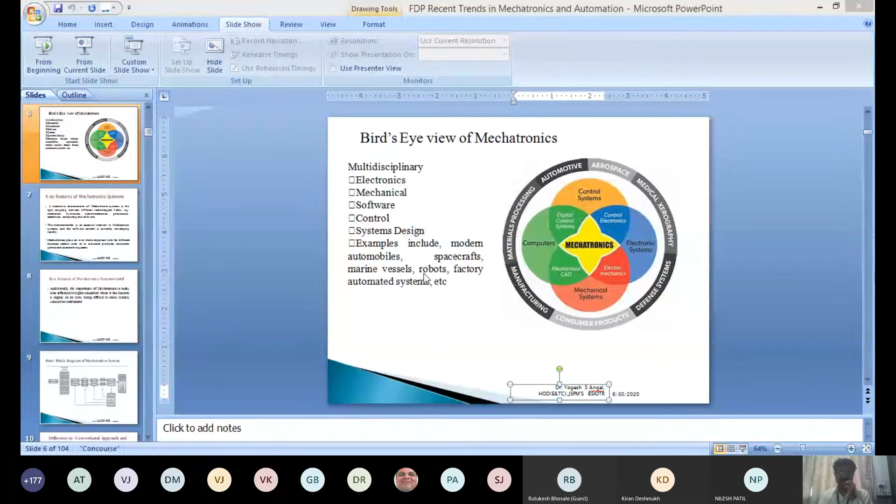Sir, please change the slide, it is remaining there. I have changed the slide. After changing, the slide is only not changed. On our screen, the slide is remaining the same.

First slide itself, bird's eye view. So I view the bird's eye view, that view screen is mechatronics remaining.

I think sir there is some issue with something. Internet connection, there is no issue now. The light came back, and I am on that particular slide, but I am not able to run the presentation. That means though I am running it, it is not getting reflected over there.

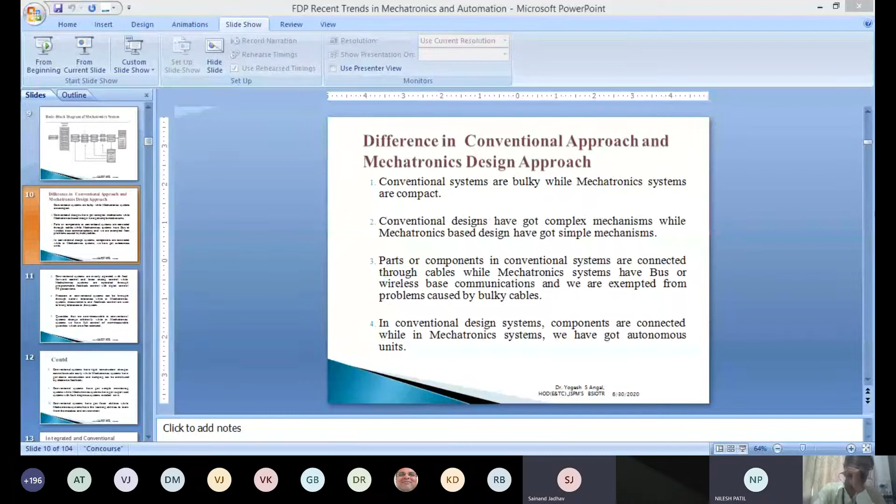I have to go back again. Now you will be observing the slide. I have to go back, then again start with the current slide. Now you will be observing conventional systems are mainly operated, isn't it? Yes sir, because I stopped and went back to my PPT presentation, then started again. That means current PPT.

Getting it? This is what is happening right now. Now suppose I go ahead, you will not get the next slide. You are not getting the next slide, no? You are having the same slide I showed previously. Yes sir, same slide is visible. That means it is not a problem from your side, my side, or the internet side. I think this is to be improved as far as Microsoft Teams is concerned.

Yeah, Microsoft Teams issue, we have to improve it, give feedback to them. Now I should not use this sentence during the presentation, but repeatedly I have to go to the previous slide and start with the current slide, then I will get that slide. Getting it? Okay yes. That is what I observed because I did it 5-6 times and came to the conclusion. Previously I thought there was some mistake with internet speed, maybe from my side or your side, but it is not like that. Now I have power, internet connection properly, there is no issue.

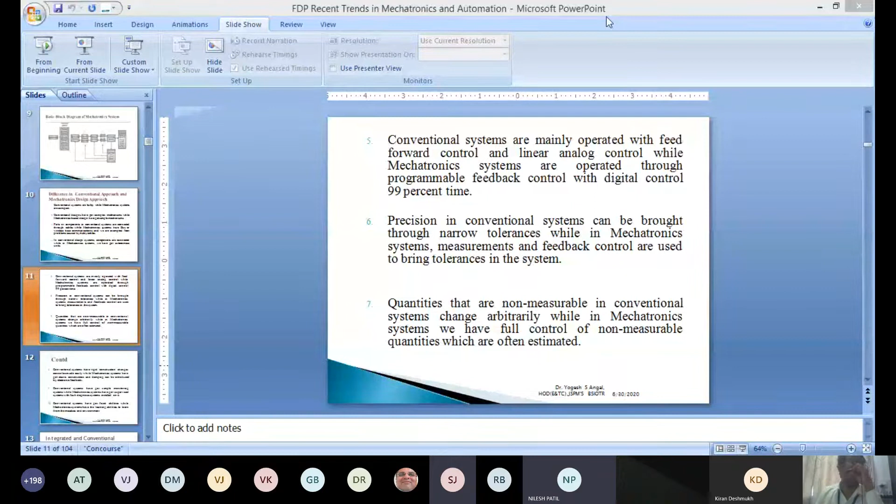Last session it was correct, no problem. In the morning session there was no problem. Slide show. So what I will do, you do one thing sir, you start from your side, I will stop my presentation. Patil sir, you do this. Because we have to take the presentation properly, otherwise I will not find it comfortable if I am not able to deliver due to some issue.

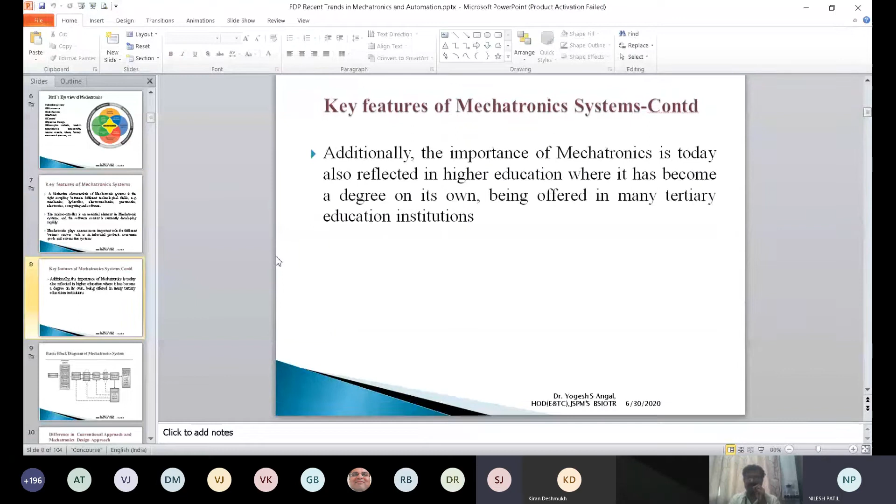Now I am not observing it. When you are delivering from that place, I am not able to see the PowerPoint presentation here.

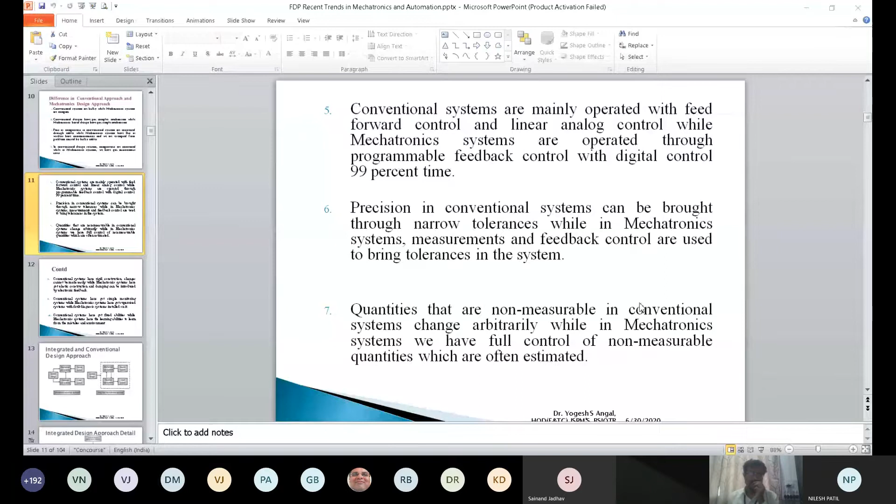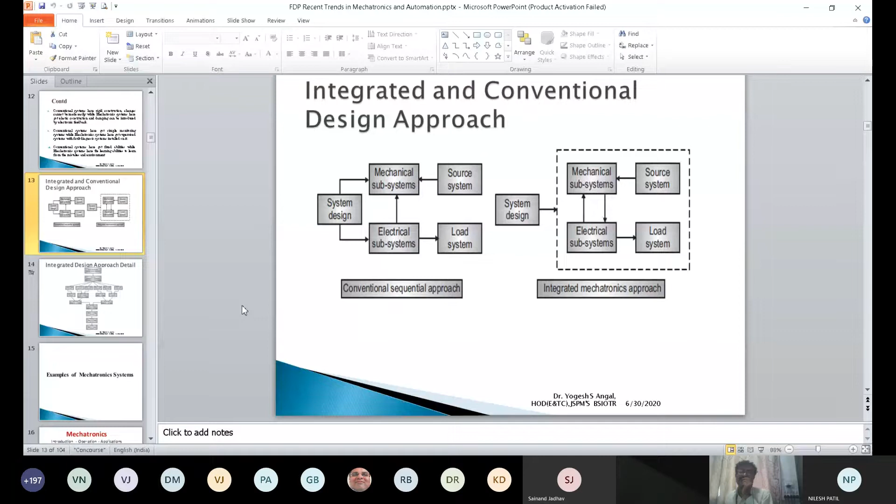System design approach in both integrated and conventional system design is different, as shown in the block diagram. Now let us understand that we have mechanical systems, electrical systems, source and load which are integrated, as shown in the integrated design approach. Here it is shown that there is a need of identification.

When designing a mechatronic system, first of all we have to identify the need and objectives of the system that you want to design. Then we can define the engineering specifications. We have to write down all specifications of the product that you want to design, which are quantitative and measurable parameters. That means size, shape, speed, torque, voltage, current, machine learning algorithms, or smart systems that you want to implement. Everything should be designed on paper.

Then we can separate the design into different parts like operating system, control systems, information systems, electronic systems, mechanical systems, and electrical systems. That means your design specifications are divided and classified into 6 parts: operating system, control system, information system, electronic systems, mechanical systems, electrical systems. These are the 6 domains under which you divide the specifications.

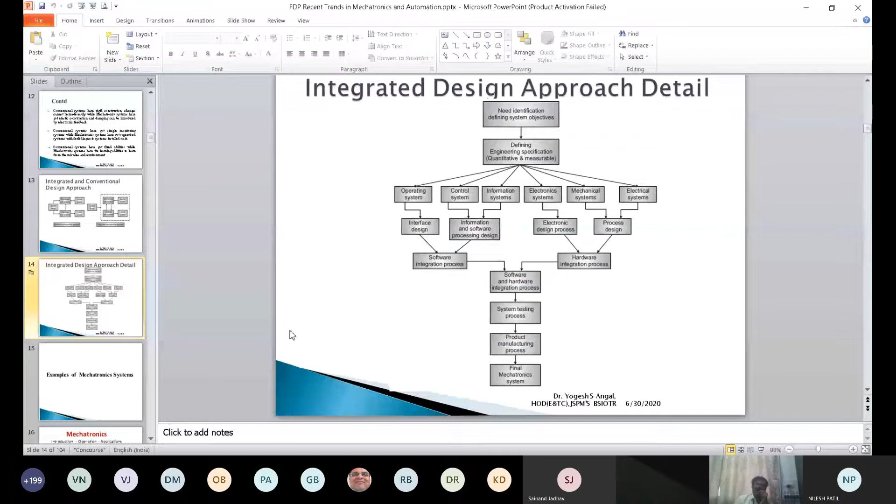This is how the integration works. Hope this integration part and conventional part you may be able to understand.

Now mechatronics has different applications. All these are latest trends. If you observe mobile phones, CNC machines, robotics, IoT, Industry 4.0, everything is now getting smart. Right from drilling machines, cars, gearing mechanisms, cameras, everything is getting automated in a compact way from the integration point of view.

Now maintenance takes place on a card replacement basis. In a mobile camera too, if it is possible to take out the camera from that embedded system, you can replace it, but it is not that easy as I told you.

Human hand, human leg, human body parts can be replaced. But what are the conditions? Let us say a 70 year old person wants to replace a limb or hand. The doctor will not recommend it. Why? Because his resistive power is less, his quality of acceptance and sustainability is less, and he will suggest not to go for surgery. His immunity and resistive power are less, and though we can do the surgery, we will not recommend replacing it because it will create more problems, as he may have diabetes, asthma, high BP or low BP.

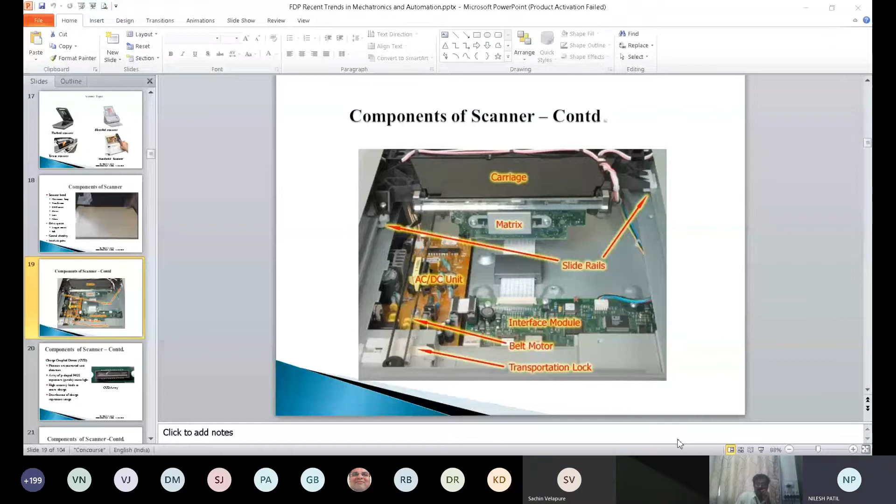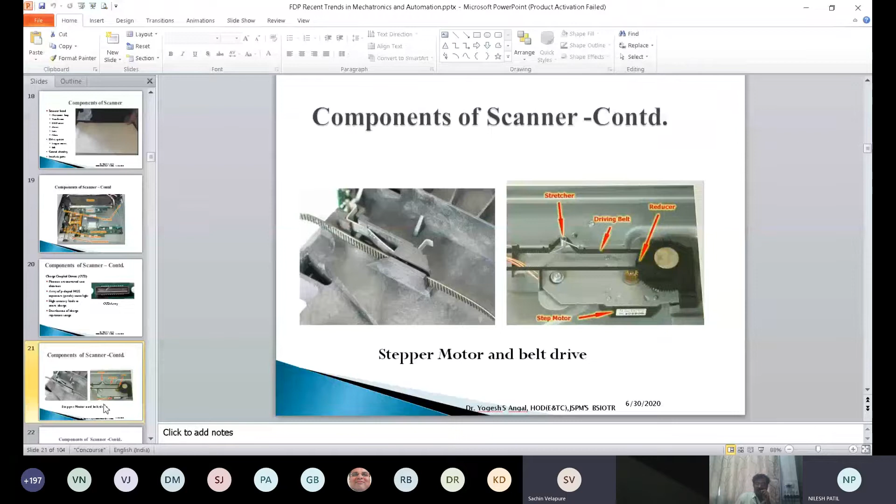Next slide. Now go again on next slide. Every component is shown over here. Now you just see it. Please wait, please wait. This is the components of scanner. Now this is the interface controller. If you observe over here, interface controllers, or you can say, various components which are shown over here.

It is consisting of ADF adapter, then transparency adapter, then USB. What is ADF adapter? Any of you know about ADF adapter? It is automatic document feeder. It is a feature in printer, photocopiers, fax machines, or scanners.

A stack of paper is put into the machine and is then automatically fed through, allowing the user to print or scan a copy without having to manually feed, which is called automatic document feeder. Then transparency adapter: it is a device or port available in flatbed type of scanner to scan 35mm slides and other film transparencies. It provides a mechanism that shines light through the film.

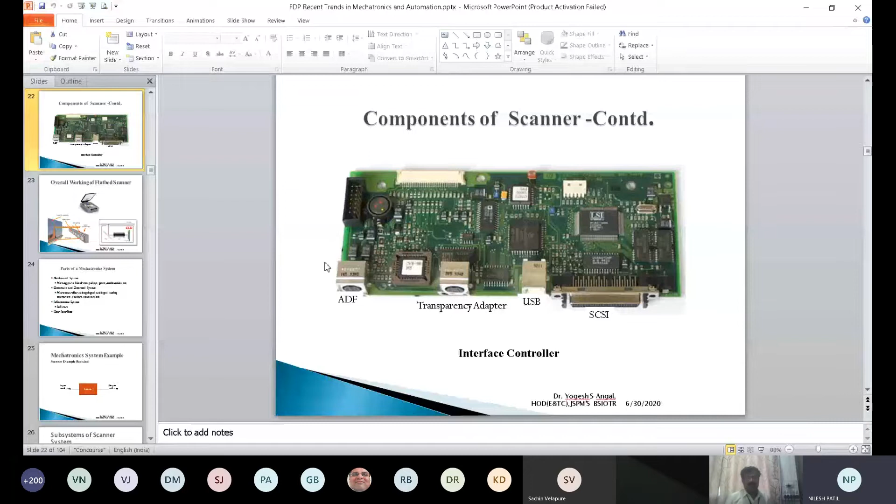Next. Now overall working, as I told you, the sensor bar is shown over here, consisting of different sensors for scanning the document. The charge coupled device will convert the light into electrons, and these electrons will be stored in the computer as an image, which you store in the memory of the computer. This is how the flatbed scanner works.

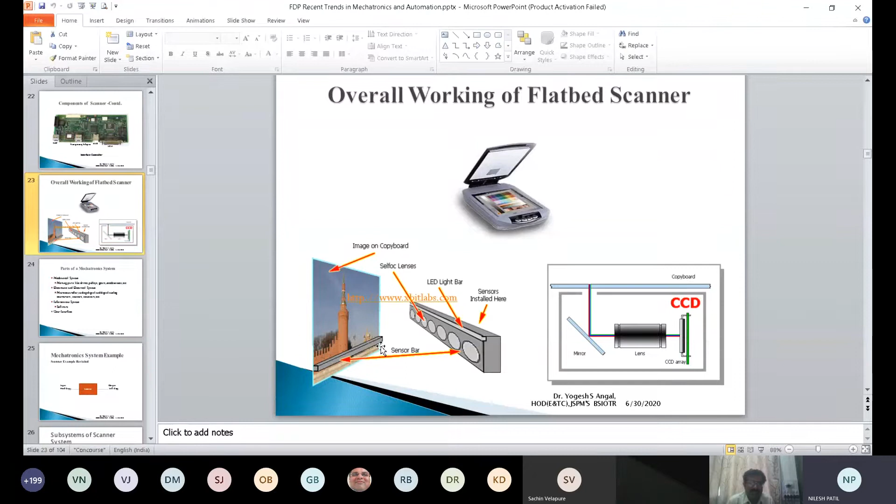You can understand the application of flatbed scanner as a mechatronics system.

Now, mechatronic system example. Let us revisit our scanner example. In scanner, what is the input? Hard copy. What is the output? Digital scan copy of that system. This is the example of mechatronic system as we have seen.

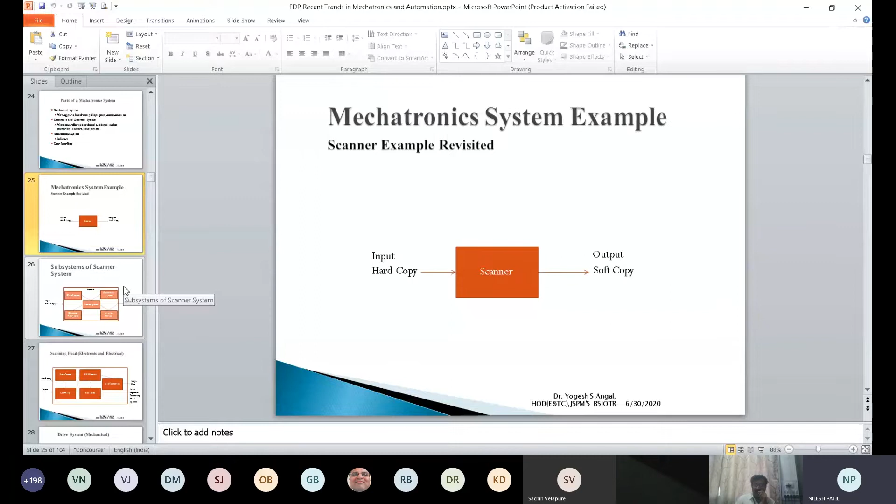Now the scanner system consists of input as a hard copy and output as a soft copy of the data that you are getting. Now the scanner components are divided into device, systems.

The scanner head is connected with all parts of the system, that is the driving system, which may consist of pulley and stepper motor. The illumination system will consist of beam of rays coming from LED array, and character recognition which is stored on computer after scanning, and other devices used for interfacing, maybe connecting for printing the document from a printer connected with the scanner.

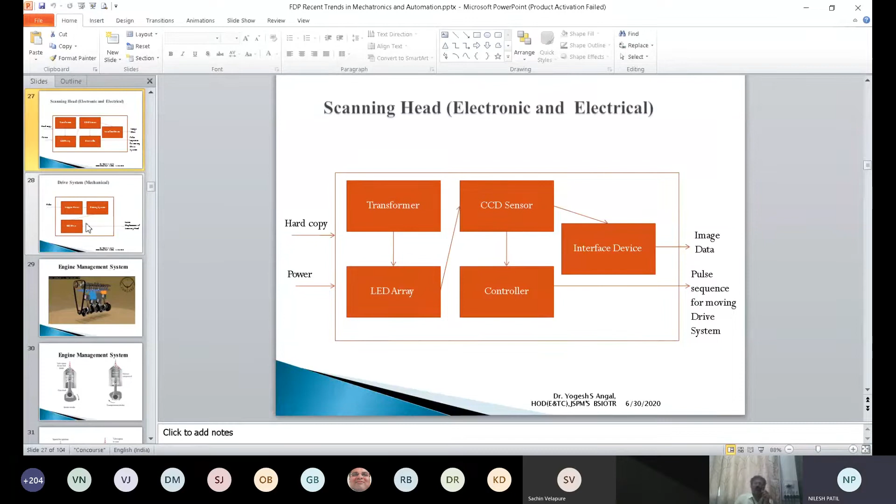Now the drive system, which is mechanical, generates the motion. The pulse input given from the controller will drive the stepper motor and gearing mechanism, which is connected with the belt drive and will cause the linear displacement of the scanning head to scan the document.

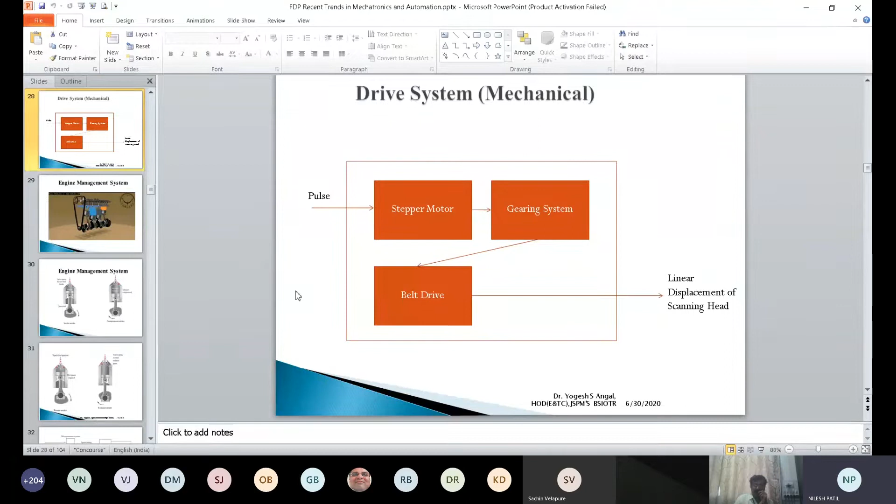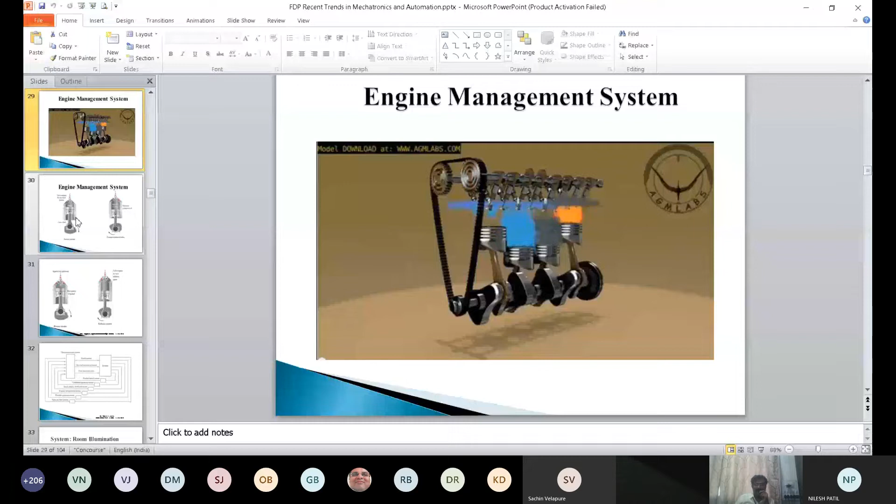Next, it is shown: intake stroke, compression stroke. The intake stroke will cause the camshaft to move and the inlet valve will open, and the air-fuel mixture will come into the chamber of the piston. Then both outlet and inlet valves will be closed, and again the compression stroke will start, and the high pressure and high temperature air-fuel mixture will get compressed, generating the next step.

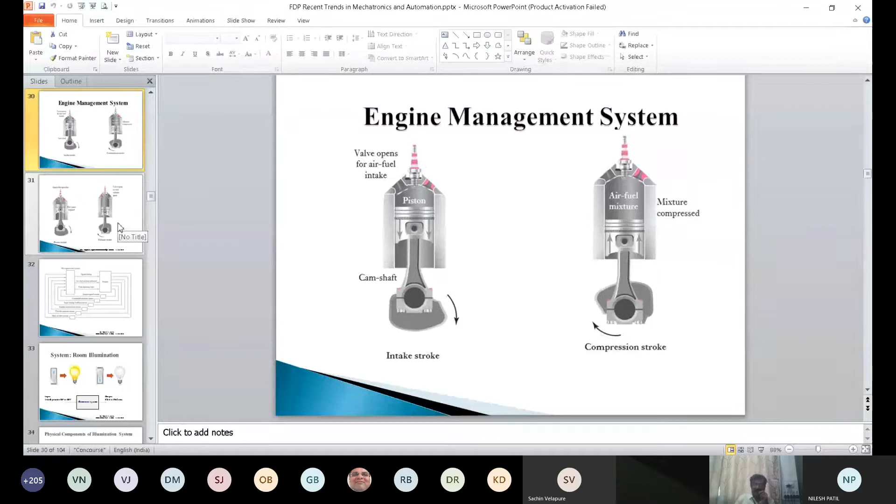Next slide. After compression, the ignition will start.

Spark ignition takes place, and the air fuel mixture inside gets ignited, generating the power stroke which causes the machine's motion. This motion is transmitted to the different wheels through the transmission, and the vehicle starts.

After the air fuel mixture burns, the exhaust stroke takes place, and the exhaust valve opens so that all combustible gases are exhausted into the atmosphere. These are the steps involved in engine management systems.

We need to understand exhaust gas parameter measurement, ignition of the coil, selection of air fuel ratio, exhaust gas and combustion gas composition, speed of operation, and level of fluid in the fuel tank. Everything is monitored using engine management systems, which is shown in the next slide.

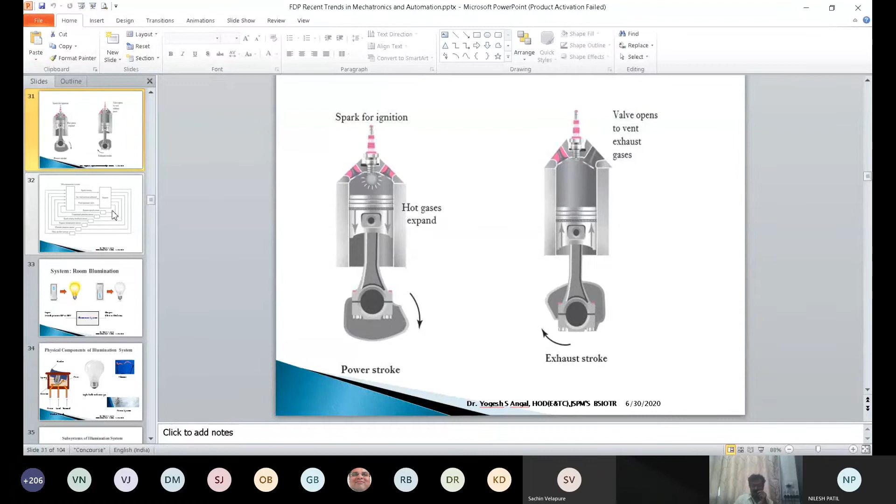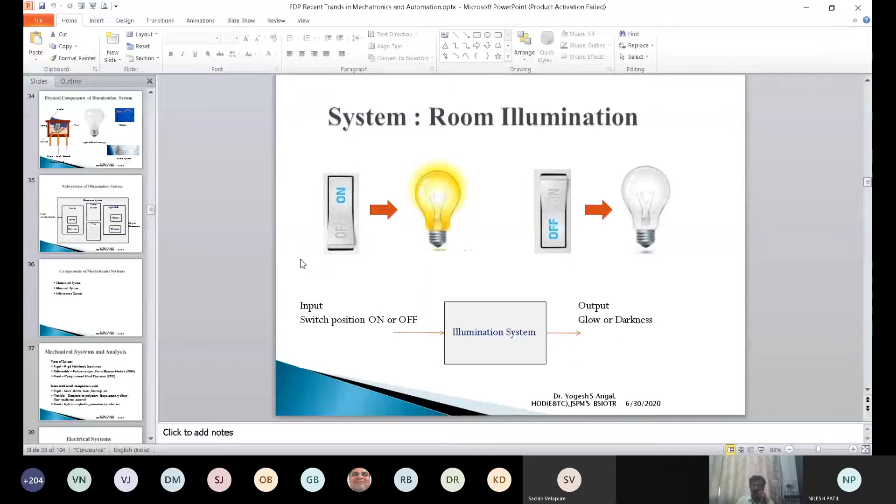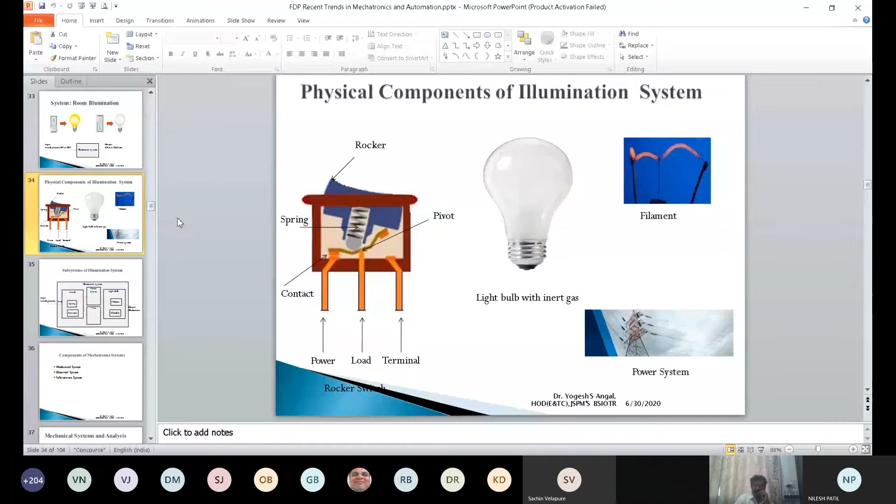The same thing is shown here. The mechanical part has spring, contacts, and switch. The electrical part has power source, wires, light bulb, filament, chamber, and inert gases. The light bulb turns on, and the output is the illuminated light. This is a simple mechatronics system.

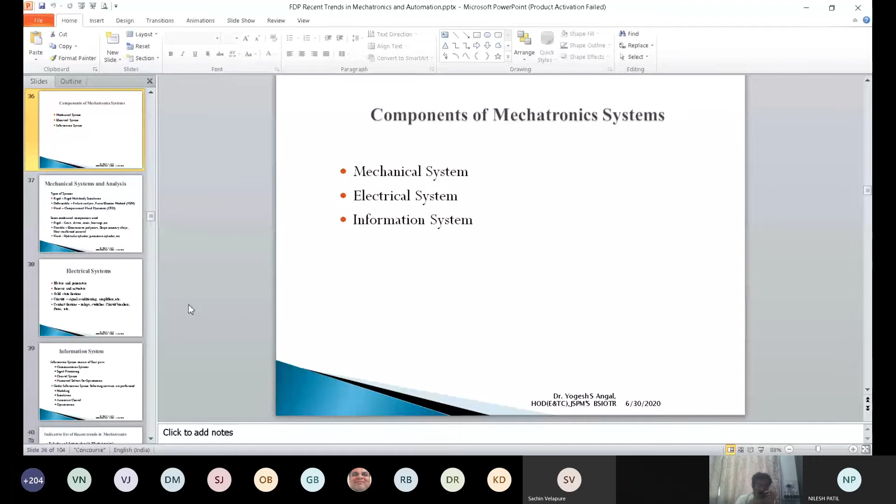As discussed, the components of mechanical and electrical systems are shown here in more elaboration.

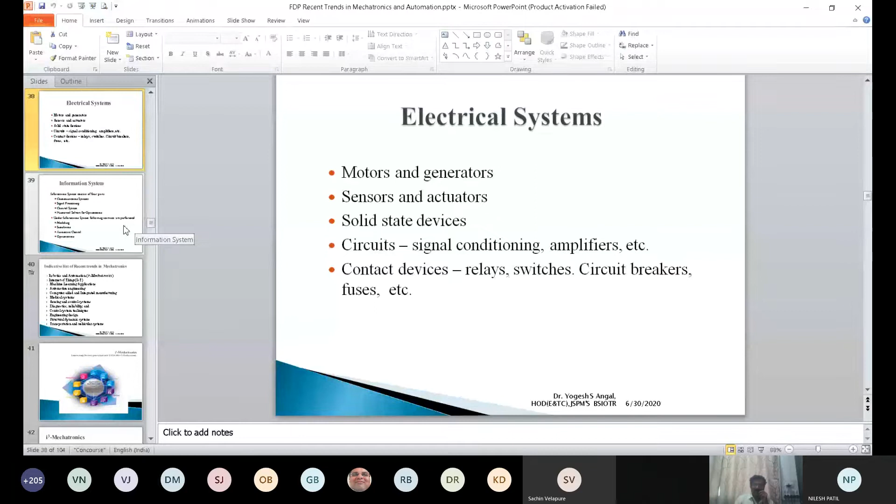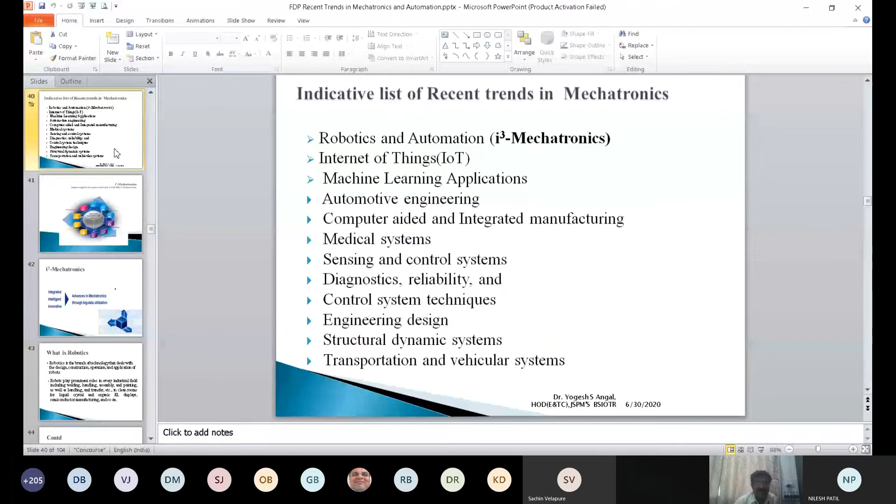Next one. That means previous one to this. Previous one to this, you just see this one. Okay fine, 41 number slide. 41 number slide.

This is the brief block diagram of Yaskawa company, which is a Japanese company, which indicates I3 technology, or you can say i3-Mechatronics technique, which is used for factory automation and which will affect different, you can say...

See here, i3-Mechatronics technique is developed. It stands for, as I told you, intelligent, integration and innovativeness.

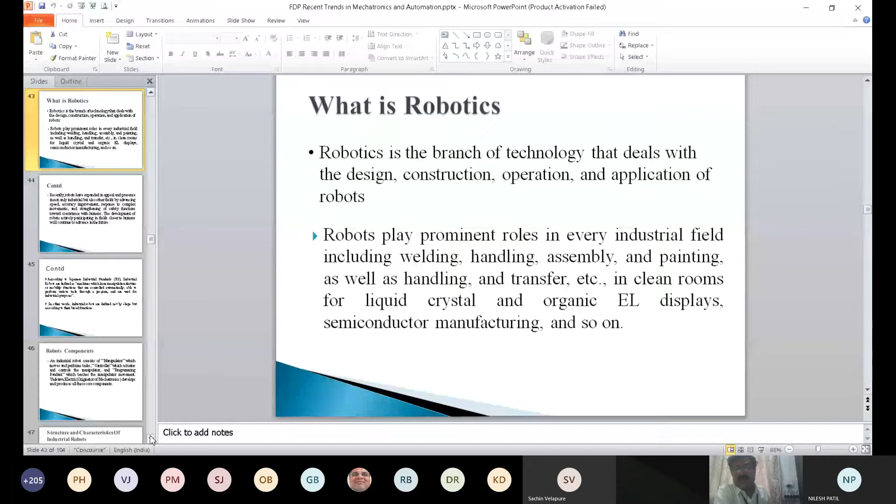Recently, robots have expanded in appeal and presence, not only for industrial but also for other fields, by advancing speed, accuracy improvement, response to complex movements, and strengthening of safety functions toward coexistence with humans. The development of robots actively participating in fields closer to humans will continue to advance in the future.

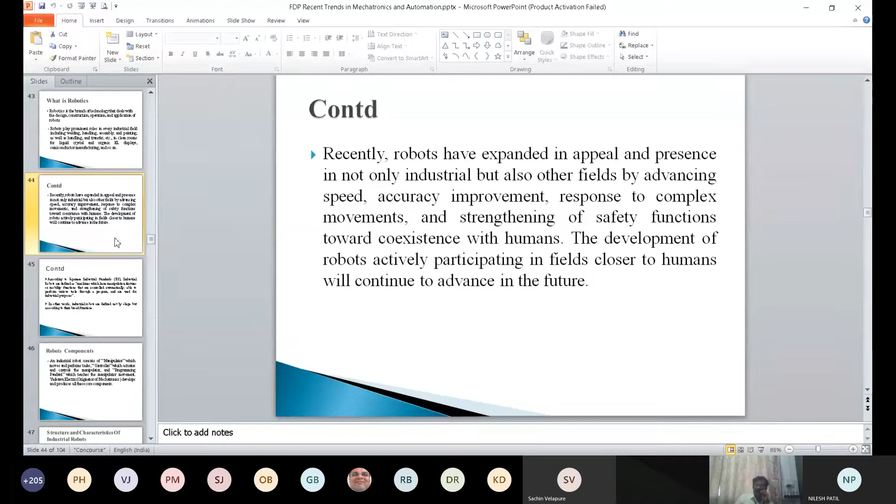According to Japanese Industrial Standards, JIS... is it visible? Yes sir, yes sir. Is there any issue with the sound? No, no problem sir, it's good. Okay fine, thank you, go ahead sir.

So according to Japanese Industrial Standards, called JIS, industrial robots are defined as machines which have manipulation features or mobility functions that are controlled automatically, able to perform various tasks through a program, and are used for industrial purposes. In other words, industrial robots are defined not only by shape but according to their broad functions.

This sentence is very important: in robotic terms, robotics is a branch, robot is a device, robot is a model, a product which is developed. Robots are not defined based on the shape, how they look, but based on the task they perform in broad functions. That is the importance of robotics.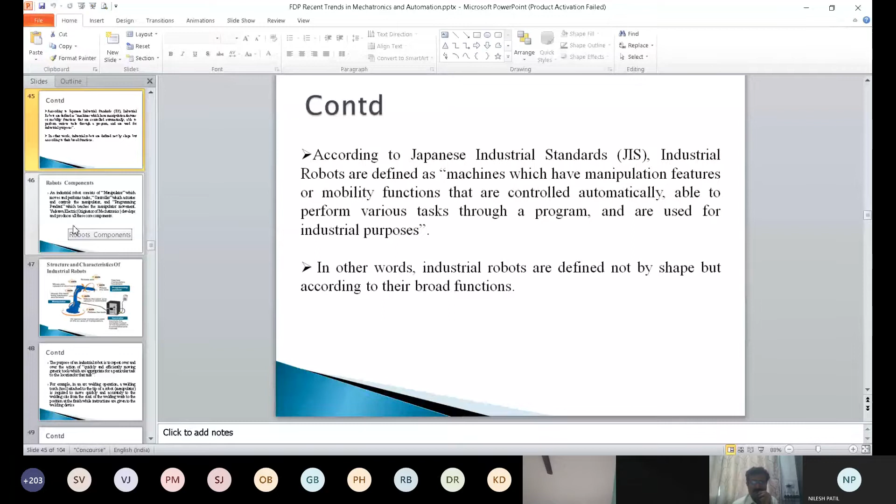Robot components: an industrial robot consists of three basic components. First is the manipulator, which moves and performs the task. Controller gives the actuation signal and controls the manipulator, because the manipulator causes the motion, which is controlled by the controller, generally an electronics component.

Programming pendant teaches the manipulator movement. Yaskawa Electric Company is the originator of mechatronics. I am trying to focus on this Yaskawa Electric Company because they are the originator of this term, which they are implementing. That's why I am focusing on that part.

Yaskawa Electric Company has developed different robots and core components, which are the recent trends in robotics. I am focusing on this specific company, which has different branches in India, Europe, and all over the world. This originator company was originally established in Japan, and they are the leading manufacturer of robots.

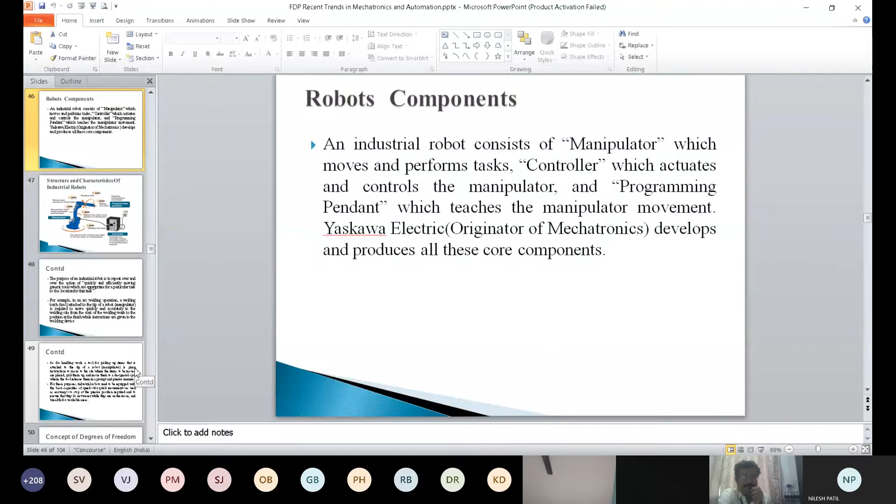Now see the structure and characteristics of an industrial robot. You will observe that the main components of robotic systems are three basic components: manipulator, controller, and programming pendant, where you do the programming. Controller, programming pendant, and manipulator, which causes the motion.

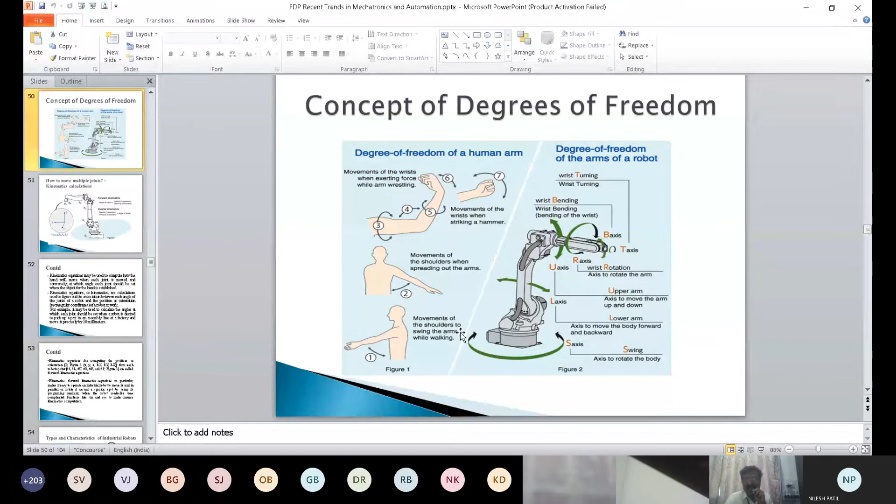Let me explain this concept in a different way. Go to the next slide, showing the correlation between the degrees of freedom of a human being and the degrees of freedom of a robot.

Here it is shown that X, Y, Z axis - just observe the diagram: theta S, theta L, theta U, theta R, theta B, theta T. All these are the angles of rotation, shown by the parameters XYZ linear motion and rotary motion. There are 6 degrees of freedom.

I can correlate this with one example. Imagine we have 7 days in a week, and let's say you have 7 goggles with you. We have to choose one goggle on one day, and the same goggle should not be repeated. Let's say I have 7 days.

On the first day, I have all choices of goggles - all 7 goggles, I can choose any one of them. That means on the first day, first choice, we have 7 degrees of freedom. Let's say it is Monday - I have all 7 goggle options available with me. On the first day, when I choose the first goggle, I have 7 choices, meaning 7 degrees of freedom. I can choose any goggle.

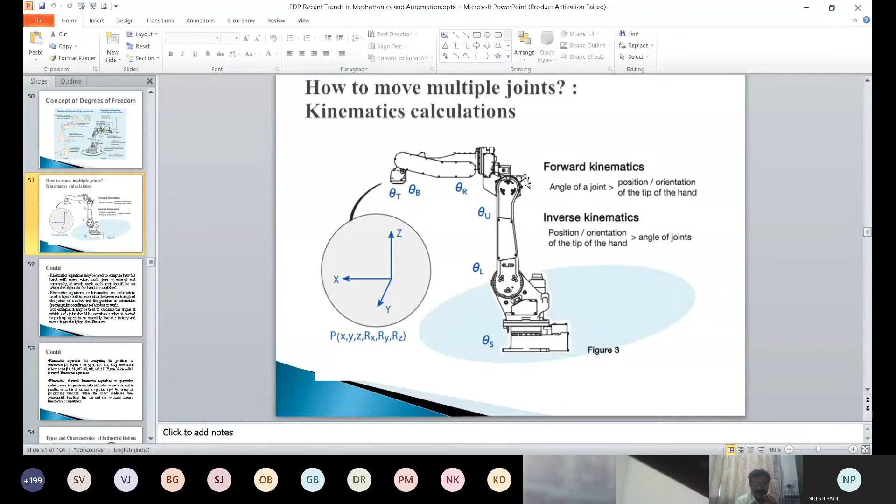Next, it is shown - all these equations of kinematics are to be considered. Go ahead, next.

Now see, there are different types like Cartesian robots, cylindrical robots. Mechanical engineering people's faculty may be aware about these types and characteristics. Now Cartesian robots, which is shown over there.

What is a Cartesian robot? Every robot has a different kind of motion. In case of Cartesian robot, it is simple, having a simple structure of 2 or 3 sliding axes joined together. They are unable to perform complicated movements. Their precision level is very high and they are easy to control, but you have to use them appropriately in areas of semiconductor, healthcare, or chemicals for tasks such as assembly of small parts or fitting of electronic circuits where motions are fixed.

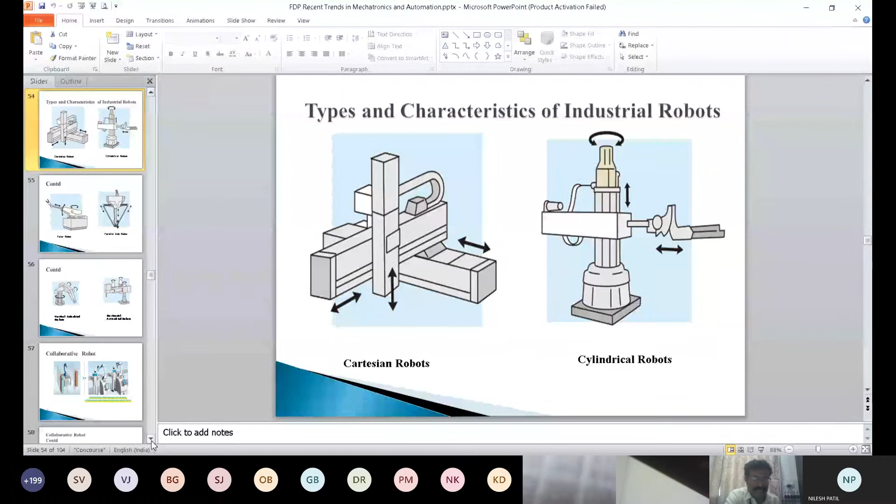Next, for cylindrical robots: these are structures that were first used for industrial robots in early years. Their field of operation is broad. They are not suitable for complicated tasks. They require to make all motions or movements. The arm of cylindrical robots rotates vertically and expands and contracts from the pivotal axis.

The arm of polar robots moves vertically and expands and contracts from the pivotal axis, with horizontal motions and vertical motions of the robot. The polar robot is shown over here.

Parallel link robot, which is shown over there. So parallel link robot is like the diagram based on the model or based on the method, as per the application we have to select one of the configurations of this particular robotic application. Horizontal, next.

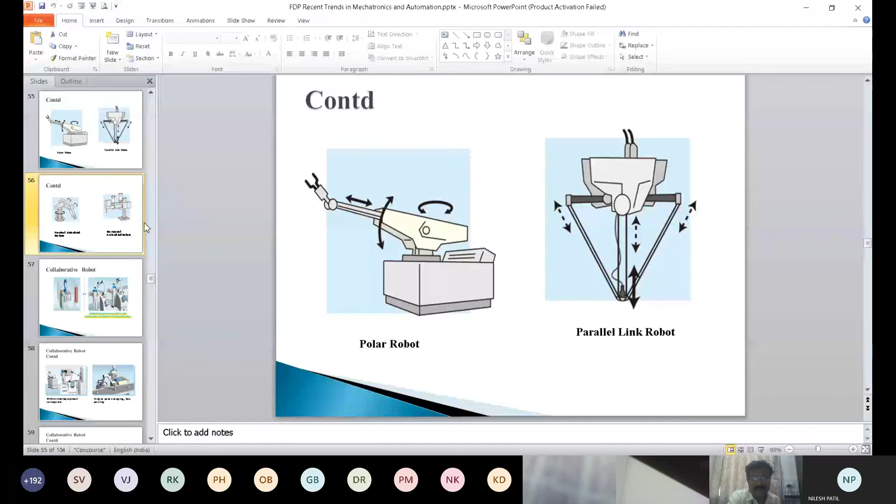Now, horizontal articulated and vertical articulated robots. Multiple joints are there, if you observe. Joint means where two components meet - like in our human body, we have joints, knees. This is nothing but the joints. In the robot also, they are called joints.

So the multiple joints of horizontal articulated robots and vertical articulated robots are connected through linkages, each of which makes rotary motions around the joints. The greater the number of joints, the greater the level of freedom, which enables these robots to make complicated movements, including roundabout moves.

Because of this, many robots today are multi-joint. The makeup of vertically articulated robots is similar to human arms, which makes it possible to say that they are probably the most rational form of robots to use for work to be done in place of humans.

Multi-joint robots comprise structures where the joints, operated by motors, and the links are connected in a series, so they are sometimes called serial link robots. Since the motors are connected at their tips, the closer they are to the root axis, the bigger the motor required, which means the robot will weigh more compared to its strength to carry the load capacity. But they have a broader scope of operability and a high level of freedom.

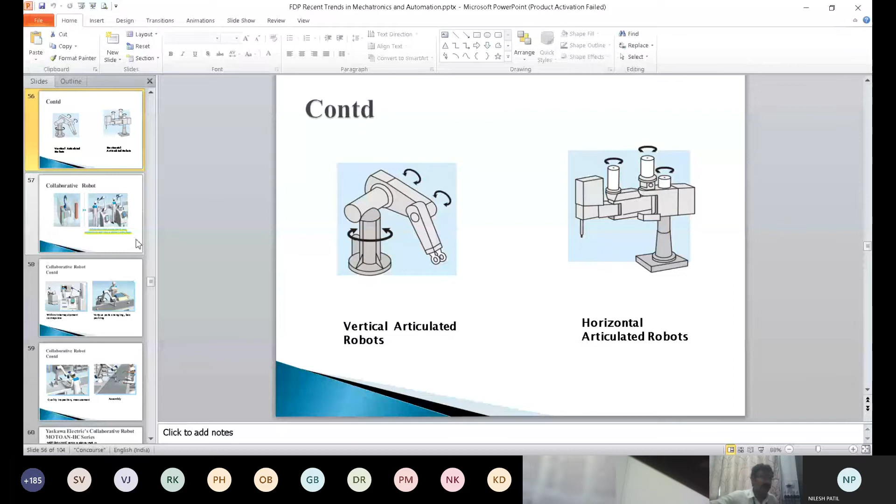Now we will go towards collaborative robots. I am just highlighting some of the points which are required to understand, and this will definitely help you in understanding the concept of robotics operations.

Now next is the collaborative robot. What is meant by collaborative robot, or what is called a cobot? Cobot means collaborative robot. When you hear industrial robots, you may associate them with images of welding or painting processes that are automated, but now they are used in many fields including logistics and food, other than automobile. Application of robots is now vast - they can be used in logistics operations as well as automobile operations.

In recent years, labor shortages were more, and that's why the use of these robots is increasing. In addition, because of the COVID condition, the way by which we were doing work previously - maybe construction work, painting work, fabrication work, labor work where labors were involved - now we are working with social distancing.

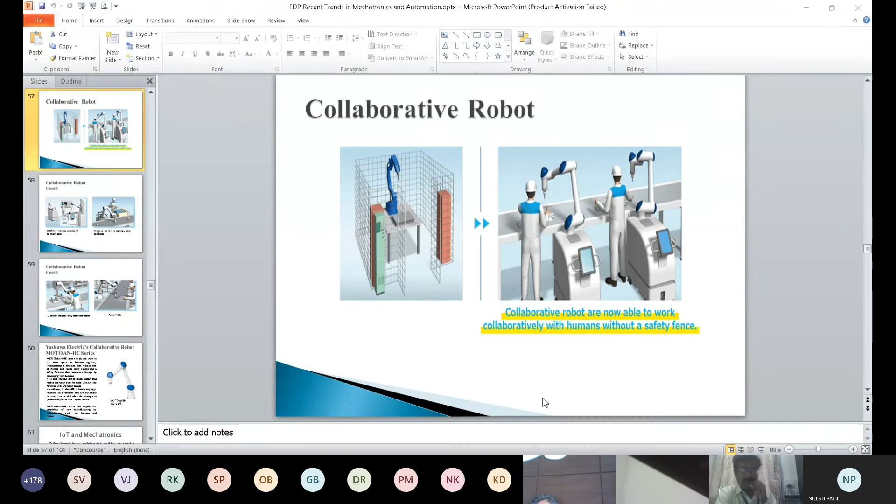Next, these are some applications of collaborative robots used previously, within inter-equipment conveyance, various parts arranging and box packaging. These cobot robots are shown.

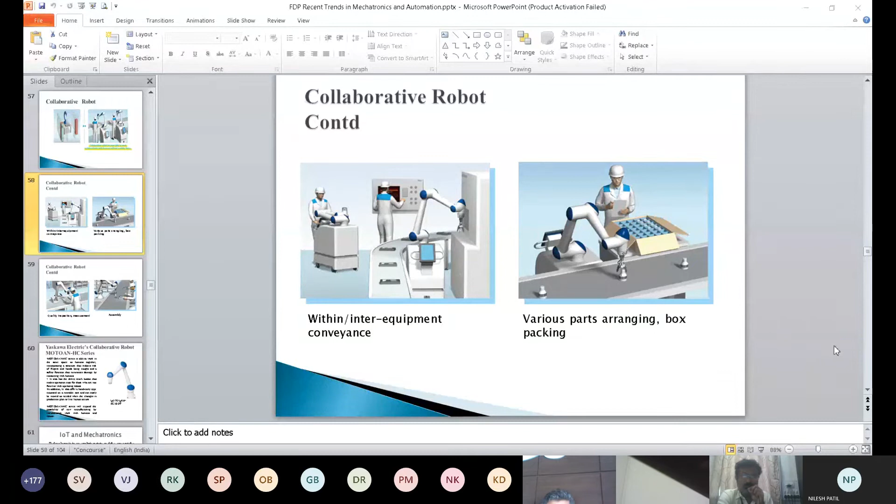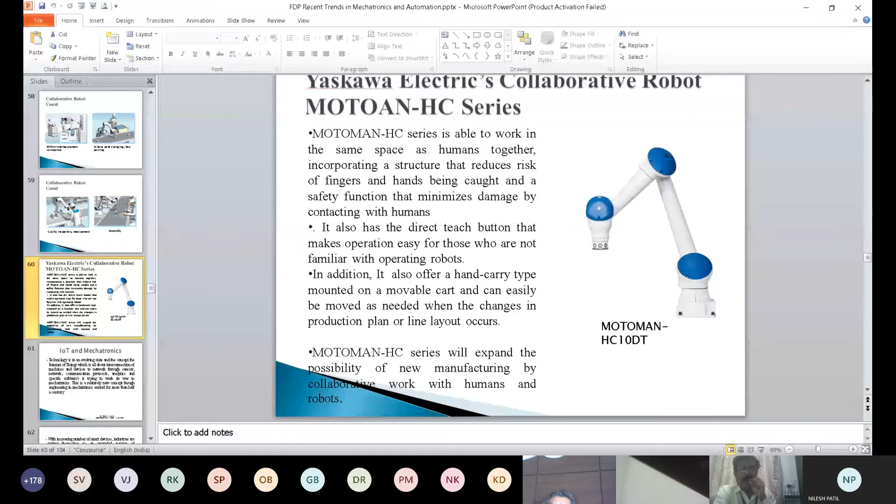Next, quality inspection and measurement, PCB manufacturing, it can be done. This is the Yaskawa Electric collaborative robot, now called the Motoman HC series.

The Motoman HC series is able to work in the same space as human, with the robot as a human, incorporating a structure that reduces the risk of fingers and hands being caught, and safety functions that minimize damage by contacting humans. It also has a direct teach button that makes operation easy for those not familiar with operating robots.

In addition, it also offers a hand carry type mounted on a movable cart that can easily be moved as needed when changes in production plan and line layout occur.

The Motoman HC series will expand with new manufacturing. The Motoman HC10DT is a cobot available with Yaskawa Electric Company. I am requesting all of you to please visit the Yaskawa Electric website, which will give you information about this particular cobot and new trends.

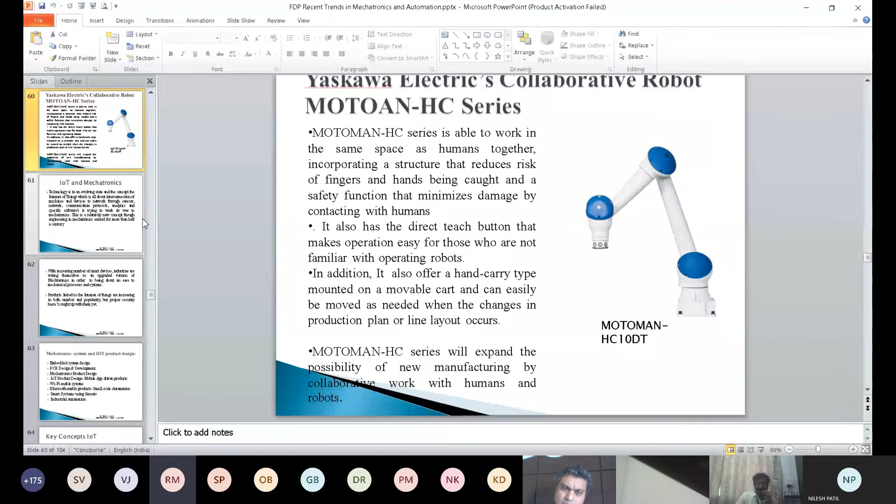Now, IoT and mechatronics. IoT and mechatronics, these are an evolving state.

The concept of Internet of Things is all about the interconnection of machines and devices to a network through sensors, network communication protocols, analytics, and specific software. With mechatronics, this is a relatively new concept, though the engineering in mechatronics has existed for more than half a century. But IoT with mechatronics is a very new concept in that regard.

Mechatronics and embedded product design with IoT product design involves embedded system design, PCBs, as shown previously.

Key concepts of IoT. First of all, we have to define the definitions of IoT. As shown, embedded product design, PCB design and development, mechatronics, product design, IoT product design with mobile app-driven products, security - every part is there as a list of applications.

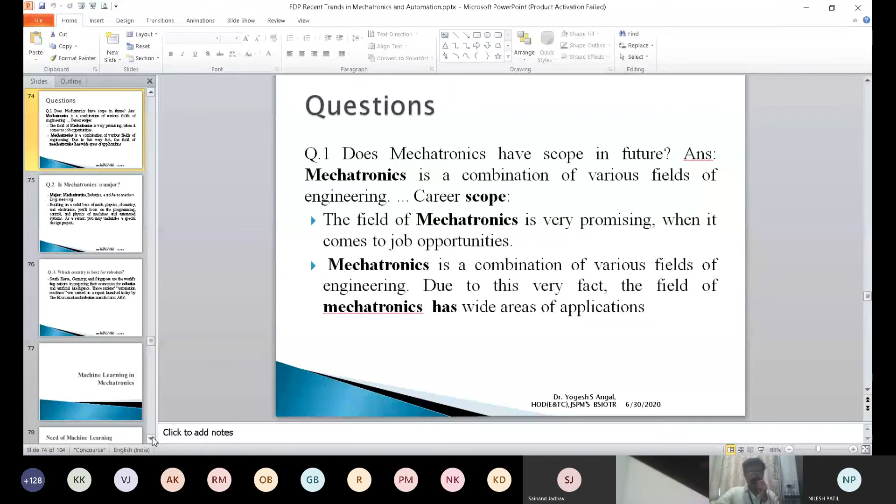Is mechatronics a major? Yes, it is a major branch, as it covers robotics and automation engineering and all disciplines, building on a solid base of maths, physics, chemistry, and electronics. You will focus on programming and control, physics of machines and automated systems, and you can undertake special design projects under this.

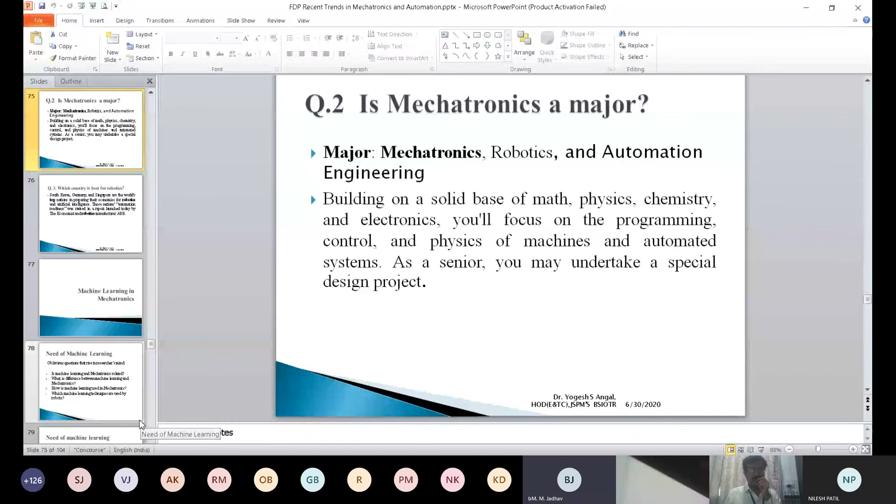Which countries are best for robotics? South Korea, Germany, Singapore, and Japan. It originated in Japan, but after that South Korea, Germany, and Singapore took the lead.

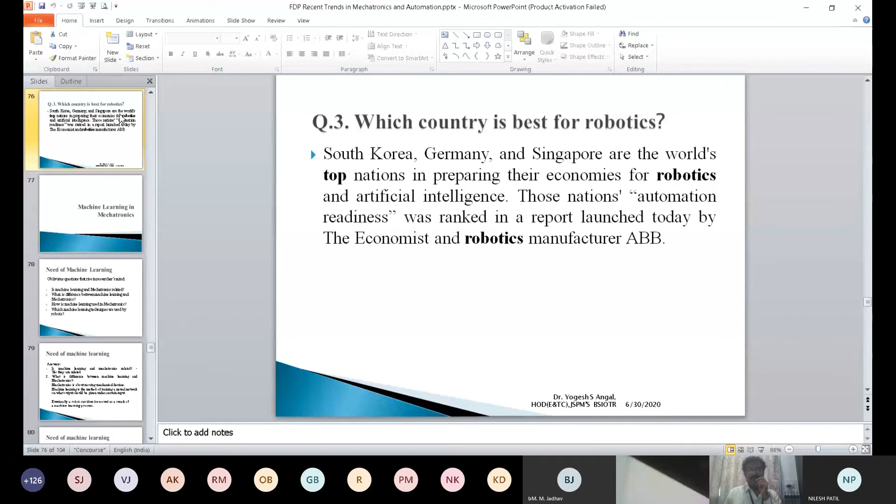Machine learning in mechatronics. An obvious question that arises in researchers' minds is how machine learning and mechatronics are related. What is the difference between machine learning and mechatronics? How is machine learning used in mechatronics? Which machine learning techniques are used by robots?

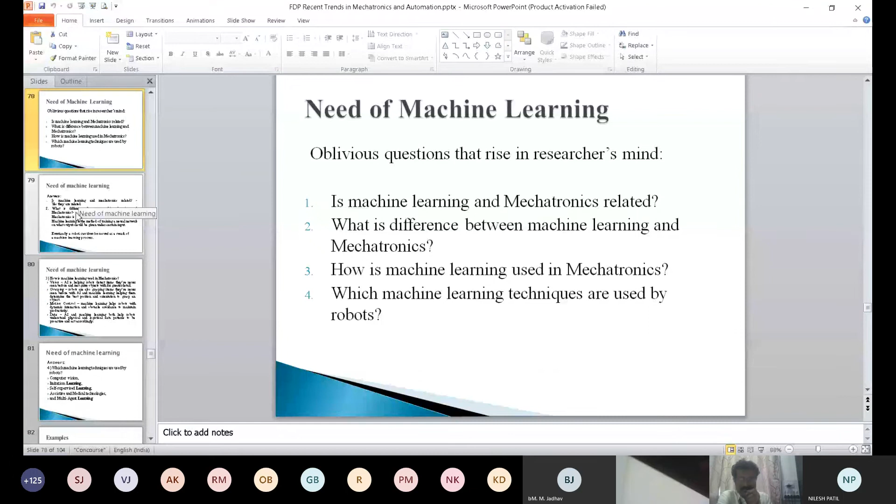Yes, there is a need for mechatronics and machine learning, they are related. What is the difference between machine learning and mechatronics? Mechatronics is about moving mechanical devices, and machine learning is the method of training a neural network on what output should be given under certain input. Eventually, a robot can be moved as a result of the machine learning process. We have to provide intelligence.

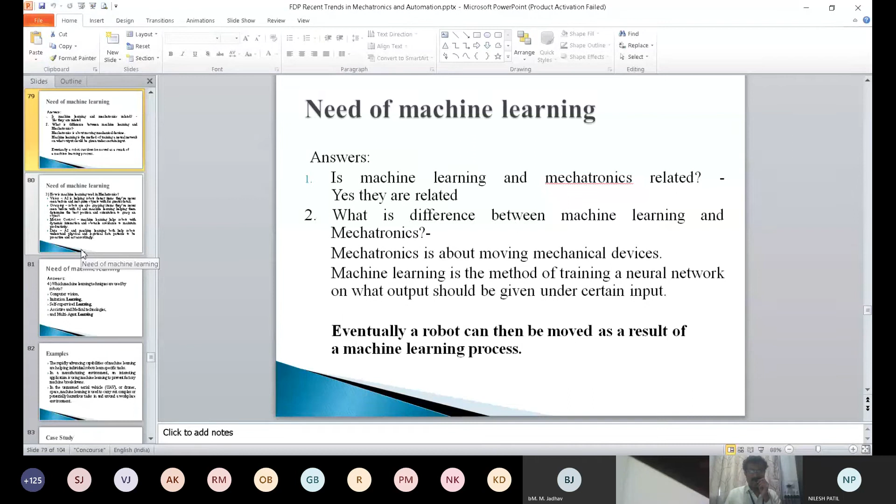Which machine learning techniques are used in robots? Computer vision, imitation learning, self-supervised learning, assistive and medical technologies, and multi-agent learning.

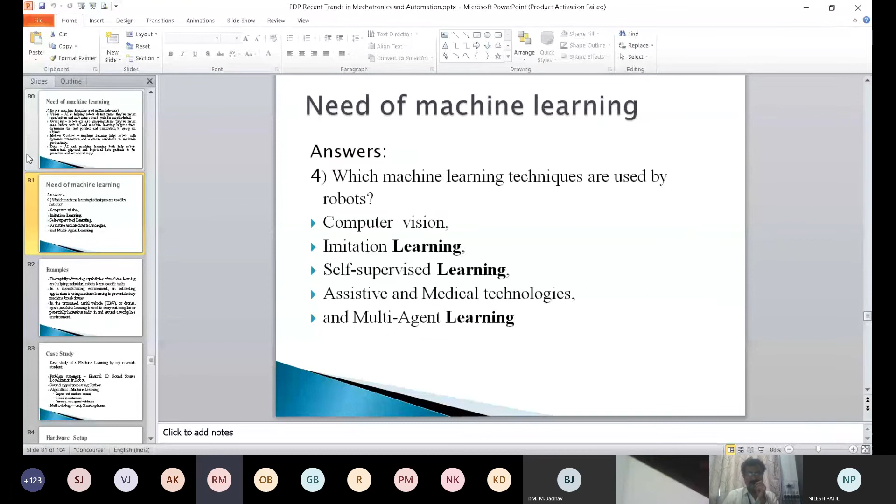I will go fast because of the case study. I think one of my friends who is working on this particular topic, Professor Vibhute, is there.

Professor Vibhute. Professor Vibhute is there on the participant side. Yes, sir, I am there, sir. I am there, sir.

So, let us discuss the setup or the experimentation that you are doing within five to seven minutes. Yes sir, what exactly are you doing and how it works as a machine learning application for robotics.

Basically, my aim is to detect the sound source or localize sources in 3D space around the head of a robot, but by using only 2 microphones. Many researchers have used more than 2 microphones, but I want to imitate human hearing, or binaural hearing as it is called. So for that, I use the robot's hearing senses to understand the localization of a sound source.

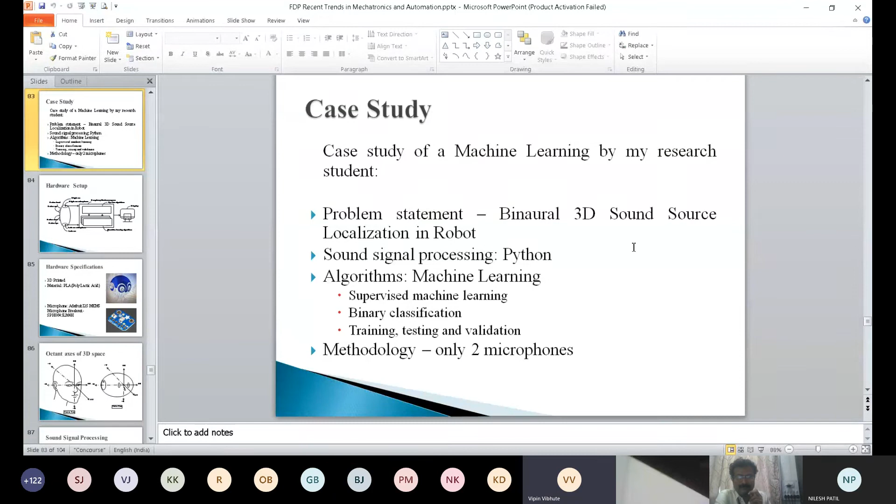Can you move to the next slide, sir? So in brief, first I have done training of the robot's sound hearing capacity. I have divided the head of the robot into 8 octants, a standard 8 octants as you do in maths, and then each octant. Can you go ahead?

For the training purpose, I have placed a known sound source in these 8 octants and recorded the level of signals, and the time difference of these signals, to identify in which octant it is located. And then the octants, so move ahead, sir. Can we move ahead in the slides?

I'm getting very good accuracy of localization in the 8 octants, and in validation I'm getting up to 94% accuracy of sound localization. And when I have done real trials of unknown data, I'm getting up to 90%.

So by training the robot about what it has to do, which is called supervised training, it is possible to implement machine learning in mechatronics. Can you move on to the next slide?

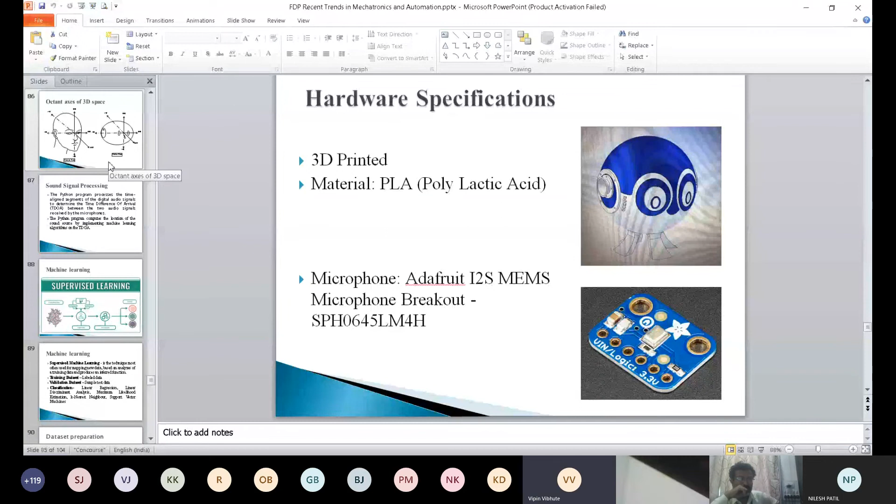This is done by proper supervised training, and I have used binary classifiers or multi-class classifiers. LDA has given me a better result than other classifiers. Training the classifier is very important for a machine learning process. If you can make a proper data set, label them properly, and do proper training, then machine learning will be very helpful in mechatronics.

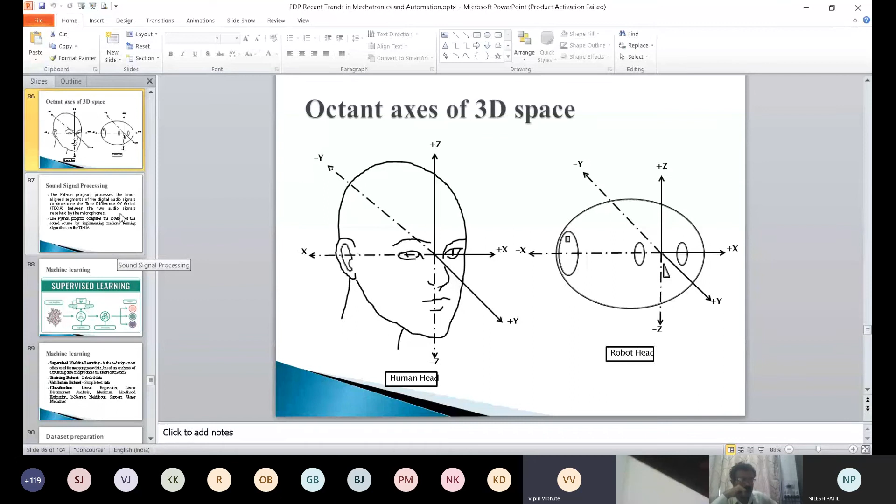Okay, fine. He has explained very fast, as I think time is getting extended. So I just want to highlight that machine learning is one of the good techniques to be incorporated to provide intelligence in the system, and the results are shown.